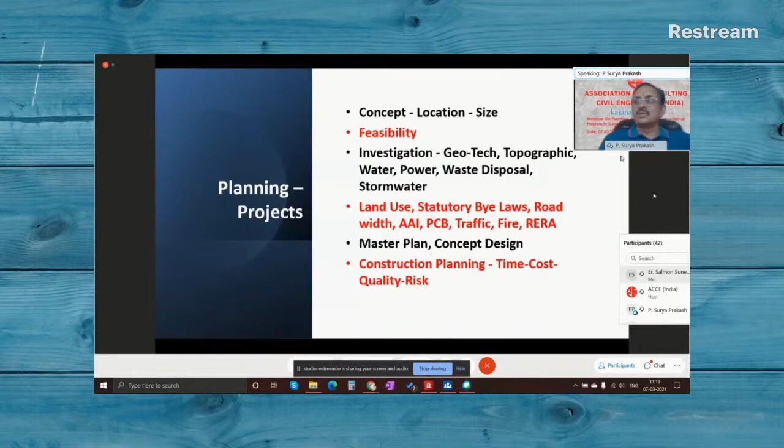And then, while developing the concept and master plan, we should also keep in mind the construction planning - the time, the cost, the quality assurance or quality plan, and risk assessment. This is a major thing actually. Now the risk assessment of the project's implementation is a major subject nowadays in construction projects, so we should also be aware of the risk associated with the project implementation.

Next is projects in coastal districts. What are all the aspects, especially we have to consider while planning the projects in coastal districts? The first and foremost important point is the exposure condition, particularly when we design reinforced concrete structures.

As per IS 456, we have the exposure conditions defined - severe, normal, moderate, and extreme exposure conditions. So we have to assess the exposure, the salinity in the atmosphere and temperature variation. And probably if we are designing the structure closer to the sea coast, the humidity and the seawater splashing also. So we have to keep in mind this exposure condition.

And then comes the marine clays. This is the biggest challenge in coastal districts whenever we plan. Normally you encounter marine clays in the coastal areas. What is marine clay? Actually, marine clay is the soil strata which has negative SPT values. That means even when you try to fill the ground - if you fill 2 meters of earth, maybe after a week it will become zero again. So it settles very fast, and marine clays we have to handle very carefully.

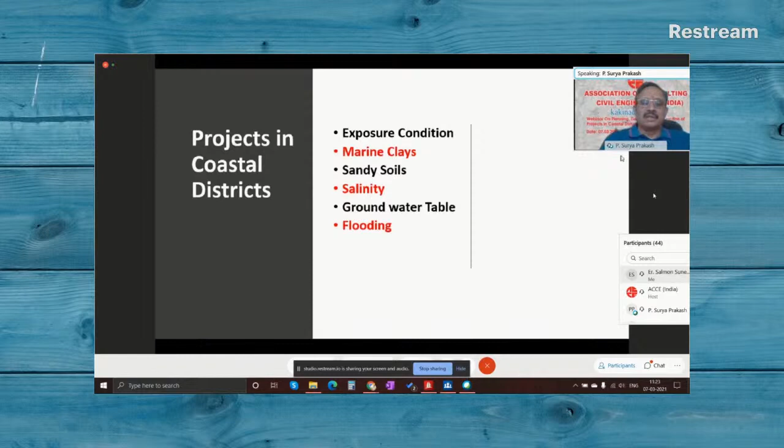Tsunami is a phenomenon which we have been coming across in the last 2 to 2.5 decades, since 96 if I am correct. So tsunami is another risk factor we have to consider while designing projects in coastal districts, particularly the East Coast, which is prone to this tsunami phenomenon.

And the cyclones. Every year the East Coast experiences at least 2-3 cyclones, and now it is increasing also. Storm surge, like we had in Machilipatnam district, that was in the mid-1970s if I am correct. So there was a big storm surge actually.

So whenever we design projects in a coastal district, the storm surge also we have to study, and ground improvement is a compulsory thing we have to consider for economical and effective foundation design.

Dewatering systems. We must all be aware that when we handle projects on the sea coast where we have a shallow level groundwater, we have to do the dewatering. Normally the practice available in coastal districts is a suction ring main, suction buffer we call it. So we put bore wells up to 2-3 meters depth, and around the building we prepare a ring main, and then we suck the water.

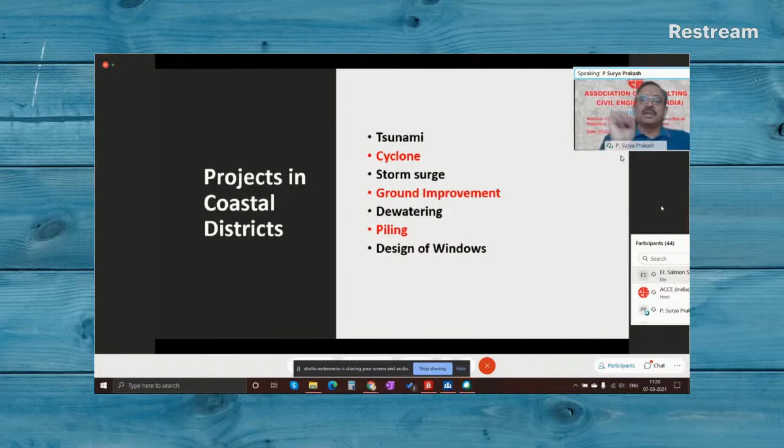So we have to test the windows, or check the windows for wind effects in the design, whether it is hinges or the glass panes or the closing. Because we design the building for a closed condition, the openings, the percentage of openings, has bearing on the wind pressure coefficient we consider. But if we don't design these windows properly and they fail, the openings will increase in the building. I have come across many buildings failing because of these windows not being designed properly.

Next is sheet piles, another method. In Mumbai it is very widely used. You can use sheet piles to cut off water ingress into the construction area. Sheet piles or touch piles is another method. In Vijayawada and even in many other project sites, we have used these touch piles.

Next is jetting, jetted piles. That is, we use a water jet to drive the piles when you have to do piling within the sea coast. Jetting is the method which I used about 27 years back in one of the projects in Tupilipalem, Gudur district.

And corrosion is another major issue if we don't take care of exposure conditions and treatment of steel structures, particularly painting. Most of us make a mistake about the application of primer and protective coating. As per code, when we apply primer to any steel structure, or even a concrete or cement surface, we have to apply the first coat of protective coat within 24 hours.

Because the objective of applying primer is to neutralize any surface exposed to atmosphere. If you don't apply protective coating within 24 hours, the neutralized surface will not remain neutral; it will again become basic or acidic. So it's a very important aspect to specify painting of the first coat within 24 hours of applying the primer.

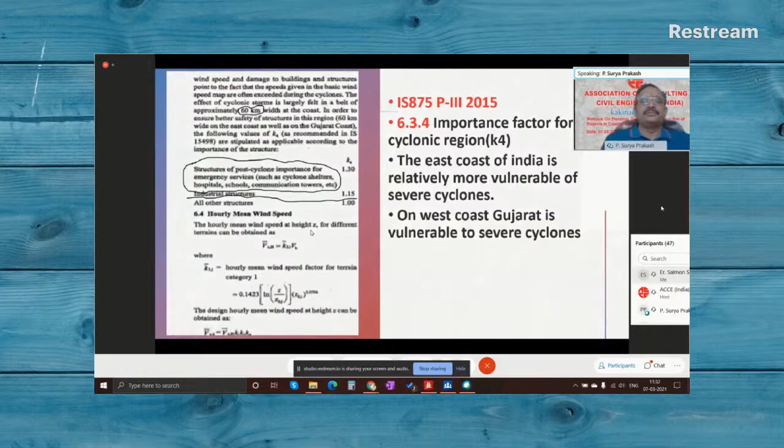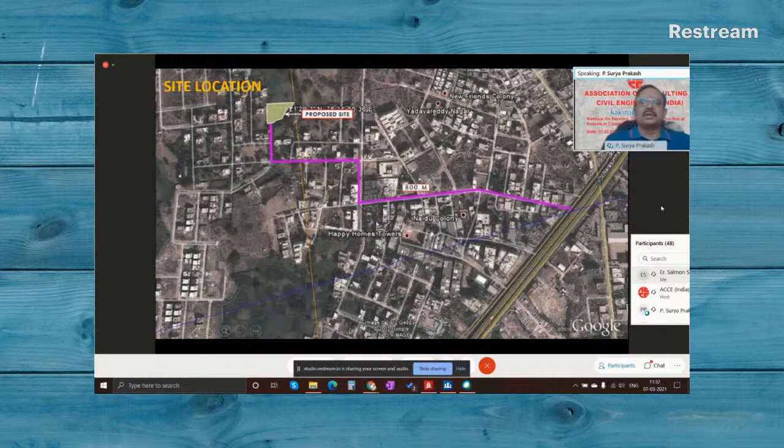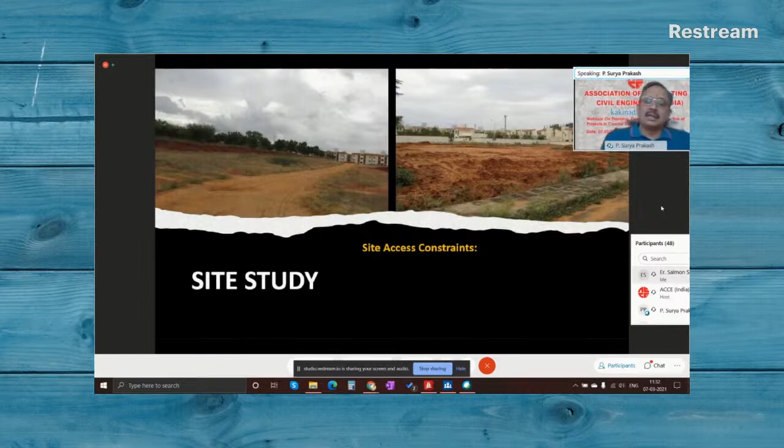Next section that we are talking about is the planning. Whenever we plan the projects, we have to identify the site location and approach to the site from the nearest highway to check the lead and the time taken for transportation. Next is the site access constraints. Sometimes we don't have culverts that are designed for the trailer loads that carry the materials to the site. So it's very important to understand the access to the site before planning and before drafting the design basis.

Next is the investigation. We have to plan the stages of investigation. The preliminary stage is to check investigation of soil, geotechnical, borrow pits, and backhoe pits also. We do this to understand the site in the preliminary investigation, and sites for disposal of surplus earth, and topographic survey.

Sorry, somebody by mistake, I think, is sharing the content. Please remove the permission to others to share content so that we will not be disturbed. I'll start. Sir, please continue, sir. Do you have my PPT or should I share now? Sir, please share, sir. Oh, I have to share. Okay. Thank you. So I request you to cancel permission to others for sharing, otherwise we'll be disturbed. Yes, sir. Already done, sir.

Thank you. And geological studies. This is a very important aspect. For all important projects like power plants, we have to study the geological history of the site, so we have geological experts who will study it. We all know the Koyna Dam story, where it was built on the Koyna fault, a geological fault, and it resulted in the earthquake. Similarly, environmental investigation, wind roses, climatic conditions by meteorological data.

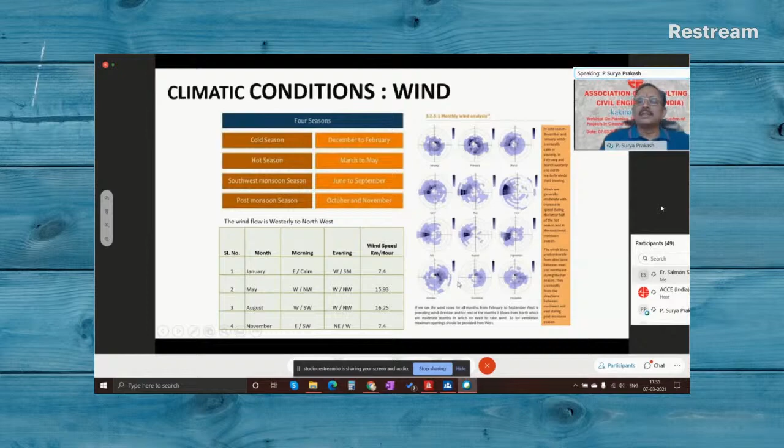So this is typical climatic condition data, month-wise: cold season, hot season, southwest monsoon season, and post-monsoon season. So we have to have wind roses like this to understand the direction of the wind. It will help us in planning the structures very effectively.

Next is the sampling of the soils. We must insist on proper investigation. Particularly, I have seen some of the soil reports: at half a meter they encounter refusal strata and leave the investigation there. Even if it is a hard strata, for important structures we have to collect core samples and have the RQD value, rock quality designation.

So it will give us the idea of, one, the costing of rock cutting and the method of rock cutting, and also the soil bearing. And the calculation of the bearing capacity in hard soils is also a very important factor. I have come across people using very high factors of safety in estimating the bearing capacity for the rock sample.

The method of estimating bearing capacity in rock is to do the crushing strength, and from the crushing strength apply the factor of safety, and then over that you apply a further factor of safety for the safe bearing. Ultimate bearing, one factor, and then safe bearing, another factor.

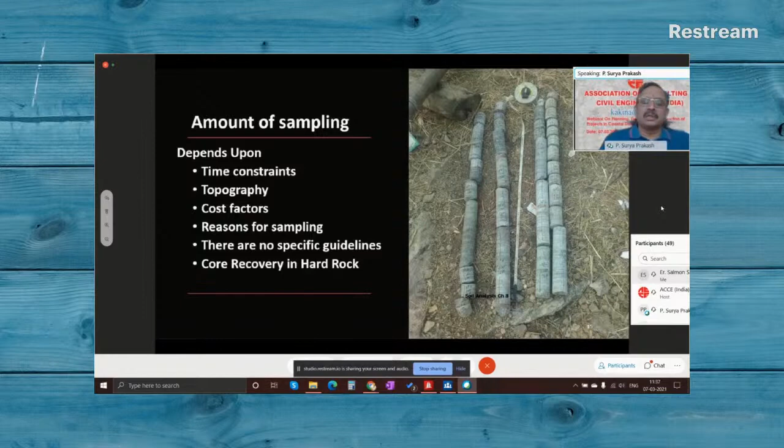So time constraints, topography, cost factors, reason for sampling: we have to decide the sampling very carefully. There are no specific guidelines given in the IS code, but as engineers we have to plan the investigation depending on the requirements of the project and core recovery of the hard rock.

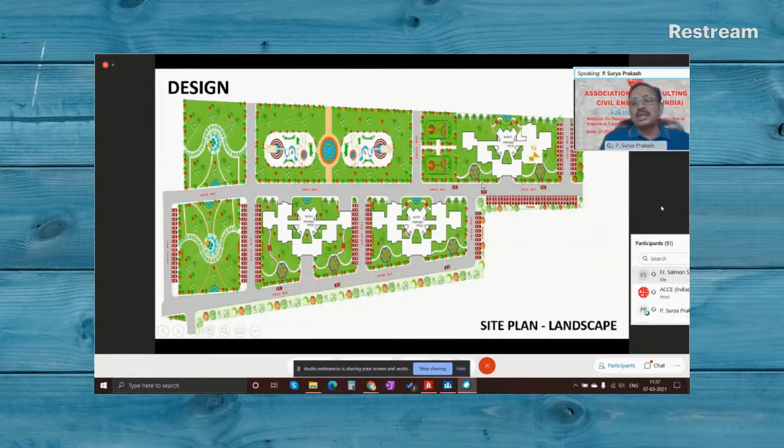So this is a typical master layout. You can see these are the proposed areas in Kudankulam. Actually, we had the opportunity to participate in the design competition, and this is the master plan we did. So the master layout is very important, and then a detailed layout, concept design of each area with the traffic and parking, greenery, and other amenities and utilities we have to consider while planning the layout.

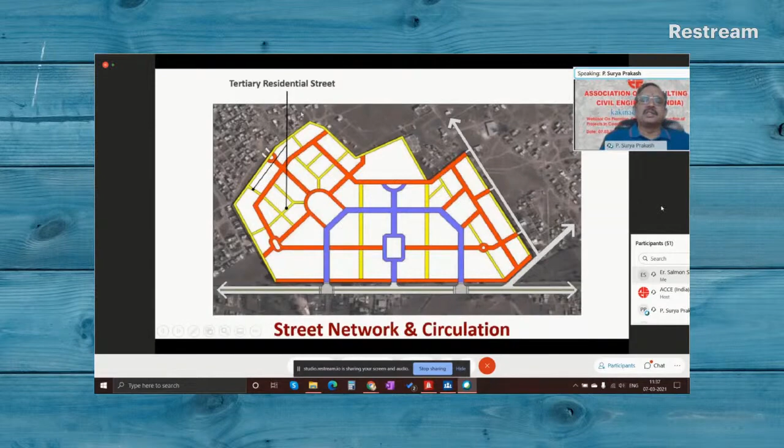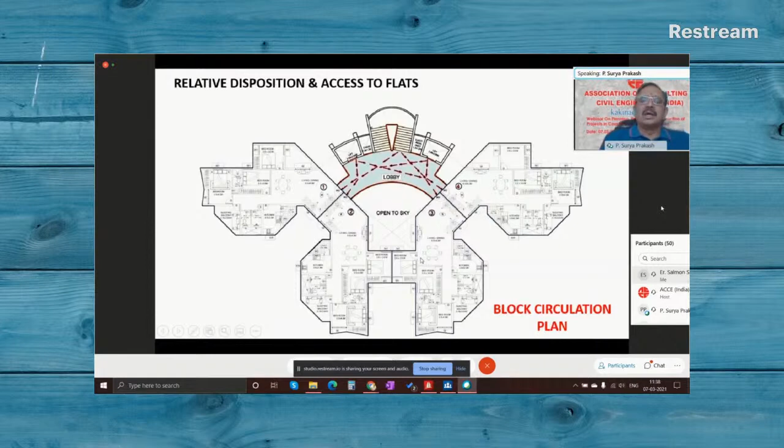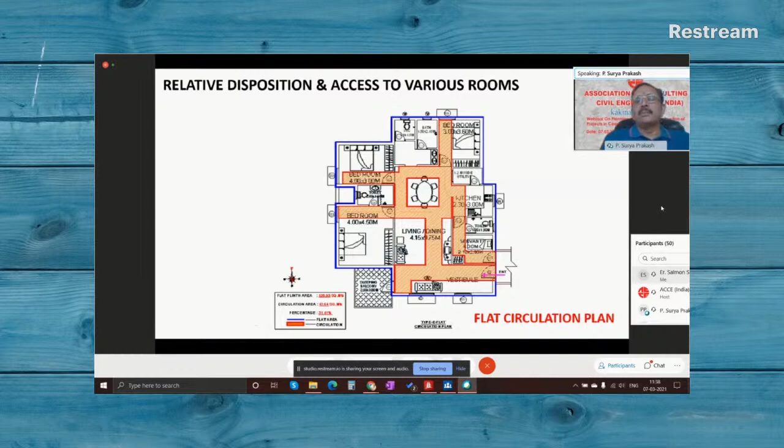And similarly, within the unit, what is the circulation area? So effective area versus circulation area. So these are all the calculations. We have a percentage of circulation of 31%. Here you can see flat circulation. Apart from that, carpet area versus plinth area versus common area, super built-up area, and carpet area versus circulation area. So these are all very important in planning, and we must consider these aspects while doing the plan.

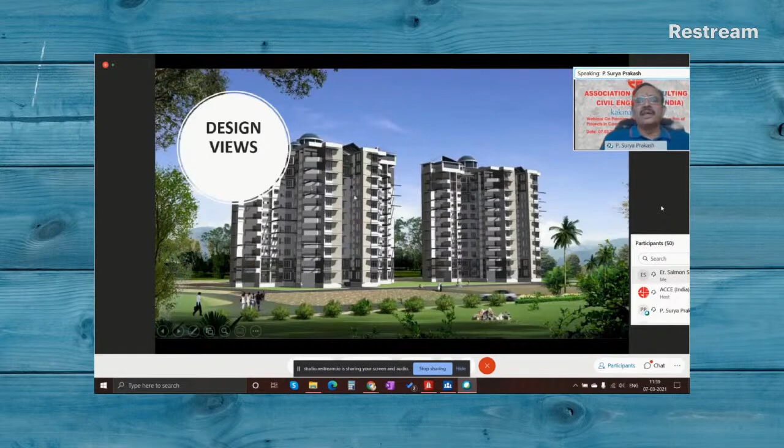So design views: this is the planning done in Seacoast, that's why I'm showing it. We thought that every dwelling unit should have a view of the sea. That's how we planned. And coming to the design, architectural, civil and structural, and MEP: the functional requirement document, FRD, considers the design intent of the client; the requirements are defined in this document. And based on that, we prepare the design brief, whether it is finishes, facade, or functional requirements like toilets or area allocation, all that is defined here in the planning.

Based on that, we do the design development and coordination, bylaw standards and codes, space, material specification, finish, utility areas, facade, and external services like amenities, landscaping, parking, entry gates, driveways. So these are all the things we have to consider in the planning. And detailing, quantity survey, costing, and the product specifications. Vendors also we have to consider in the design stage itself. And the financial, technical, and tender approval for procurement before going to the construction stage.

So next is construction engineering and procurement, like contract packaging, site enabling, and method statements for execution. I always say that we should never leave the method of execution to the engineers on site. The contractor's planning engineer should prepare the method statement for each activity, whether it is excavation, marking on site, PCC, or waterproofing; for all activities we must prepare the method statement and get approval from the consultant. This we have implemented in projects, where there is no misunderstanding of the drawing and the method of execution.

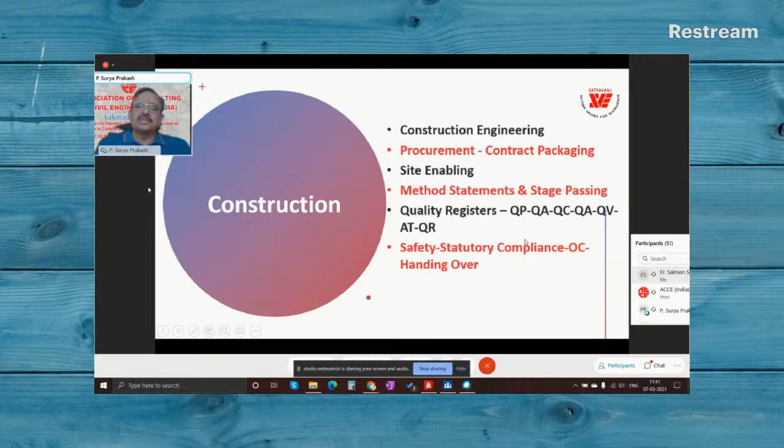Safety, statutory compliance, occupancy certificate, and handing over. So these are all the steps that are very important. So now getting into the core topic of today, that is projects in coastal districts done by our company, case studies where I'll explain the contribution that we have done for various coastal projects, so that it will help you to consider these aspects while planning projects in coastal districts.

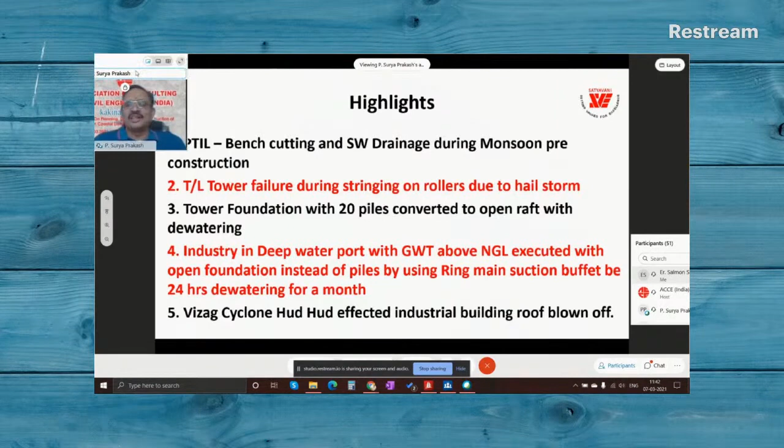So I'll share the highlights. We are used to reading headlines in the newspaper, so same way I have put the highlights of each project. So PTIL is a project we did in Pedapuram, which is about 50 acres of land sloping towards the highway, and the client wanted leveled ground, and we foresaw that flooding would be an issue because the project commenced in July, and July is the month with maximum rainfall in East Godavari particularly, so we planned the stormwater drain.

The client was joking with me in a lighter vein that you are doing an irrigation project instead of an industrial project. I said, sir, this is very important because we had a very stiff timeline of 9 months. We did the foundation stone in July, and that July had the highest rainfall of 100 years. Fortunately, because we constructed the stormwater drainage before commencing excavation itself, my client sent me a photograph of that drain full of water and said, good you have foreseen this situation. Otherwise, our project would have come to a halt.

Imagine 50 acres filling with water, and if you have to do dewatering, you could never complete the project. Thankfully, we completed that project 6 days ahead of schedule in 9 months, in spite of the heavy rainfall. The stormwater drainage really helped. It's one of the important things I did in the mid or late 90s in Kakinada.

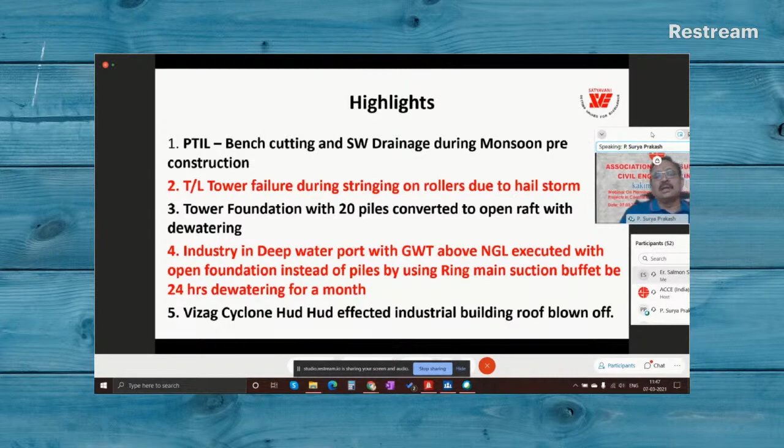But when I reviewed the soil report of that site, I found that up to 6 meters depth there is a good strata, and beyond 6 meters it is marine clays. Normally we go for pile foundations when you have the hard strata at a deeper depth. But here, the marine clay is there from 6 meters up to 30 meters depth. So it is never economical to go for pile foundation in such a case, because for industrial sheds the loading is less compared to a normal building.

So I suggested to the client that we go for open foundation with the dewatering system. And I have shown the calculation value engineering report where I was saving 20 lakh rupees, apart from saving the time, because we could complete the entire foundation system within a month's time by maintaining 24 hours dewatering for that site. Unfortunately, I couldn't locate that photograph because it is more than 20 years old. But we could maintain the dry condition for a whole month and completed the foundation. And the client was happy because we saved the cost and time.

Next is the Vizag cyclone Hudhud affected industrial building. The roof is blown off. A very surprising incident in Vizag, a structure designed by us. When we investigated, we found the problem was the anchor fasteners, the self-tapping screws we use for the roof sheet. Even the Vizag airport roof was blown off during Hudhud. So it's very important to specify the anchor fasteners and test these anchor fasteners.

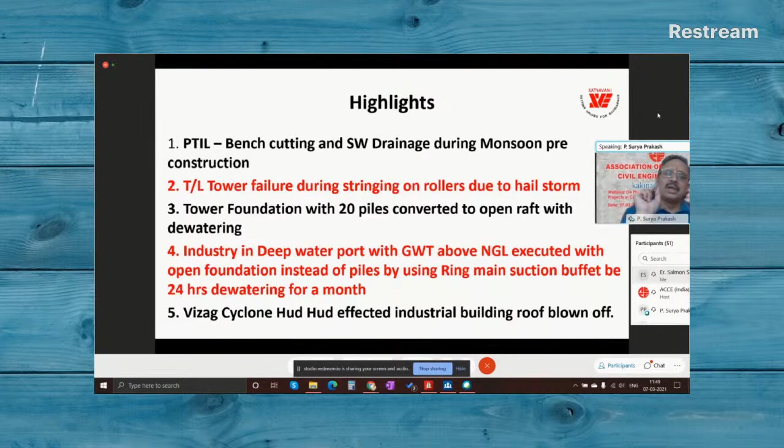The washer that we use and the tightness we have to specify and check very carefully, particularly Hilti fasteners with neoprene washers. We have to use the neoprene washers, not the rubber washer. Because the cost difference between neoprene and rubber washer is too much, contractors tend to go for rubber washers. So we have to check these washers also, because the rubber washer will get decayed with water exposure, whereas neoprene is a material that will stay for long. So it's always better to use the neoprene washers. That is very important.

Next is the power distribution poles. We were consultants for the Government of Andhra Pradesh for hazard mitigation and the emergency cyclone recovery project. I'll share some of the photographs where the distribution poles, normally put along the roads and canals, particularly in East Godavari, will be inclined. Normally these pole foundations are not designed properly. We have to design them as a stem foundation. That means we have to use the shear modulus of the soil for design of this pole foundation.

Next is the plinth level for the towers in paddy fields. This is another thing we observed. Most of the towers had corrosion in the bottom stub portion right above the plinth level, because for the plinth level they used to follow 230 mm, 9 inches above the ground level. In paddy fields, the water itself will be about 1 foot. And in the rainy season the water level will rise, and because of the exposure condition there will be extensive corrosion in the leg. So we have specified an increase in the plinth height.

Next project we did is in Cochin, Hyquip. There is a marine clay, and when we started the ground leveling, it used to sink. So we have used prefabricated vertical drains so that you take out the water as you fill the soil. This is a ground improvement technique which we adopted, which I'll also share.

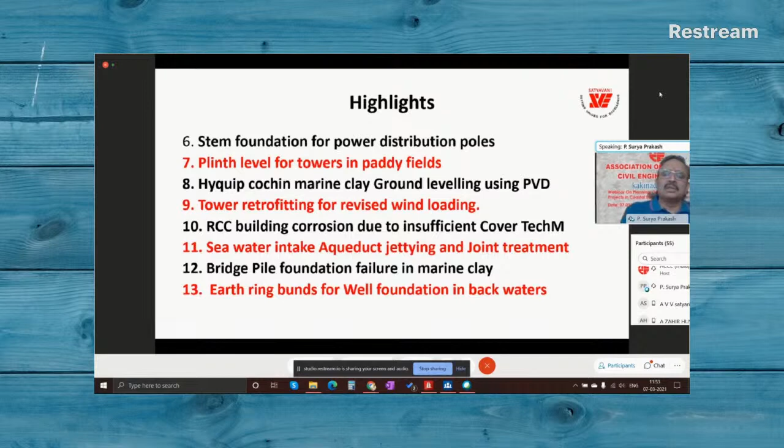And earth ring bunds for well foundation in backwaters, and then roof sheeting anchorage, as I said, clamps, screws. Nowadays we are having the standing seam, seamless roofs. There we use the clamps, so we must check and inspect these clamps very carefully, or if we are using screws and washers, we must check these screws and washers.

Expansive swelling soils: proper design of piles, or treat the foundation soil. That's very important. No saline water to be used in construction. So check the water quality in coastal districts. And you have to give provision, if required, to treat the saline water or to remove the salinity in the soil. And mostly we use sulfate-resistant cements in the coastal regions. In the very first project in '94 itself, we used sulfate-resistant cement.

Seashore sand not to be used, that is very important. And many people tend to use pit sand, which is also not good. We have to have sand conforming to the gradation specified in IS 383. And scouring, this is another important phenomenon. On the sea coast, you will have scouring of the soils, soil erosion due to the wind. So we have to consider these aspects.

And uplift anchorage at every stage of load transfer and side thrust. This is very, very important because in buildings, industrial buildings particularly, there will be uplift in the structure. So we have to check the anchorage, do uprooting tests, and check the foundation and the structure also, because cyclonic winds will lift the structures. So we have to check uplift anchorage at every stage.

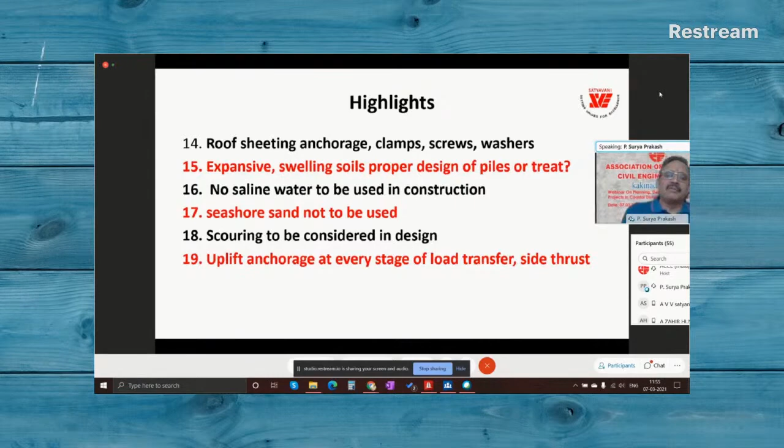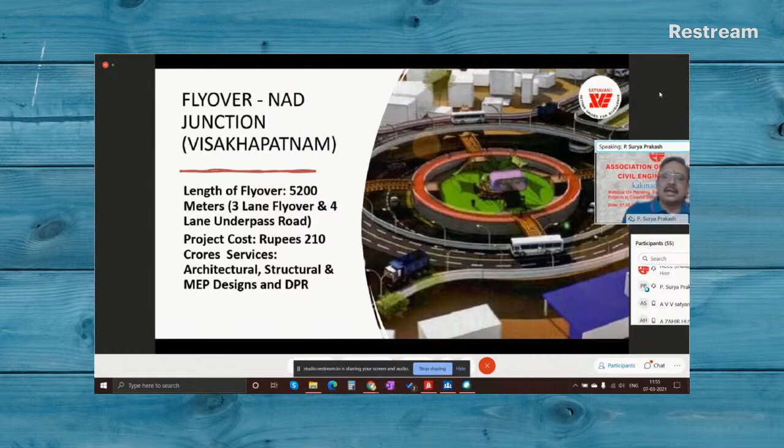So now I'll be sharing the photographs of the projects. This is a flyover rotary management system we are doing in Vizag, which is nearing completion. We have completed the design and execution is in progress. This is the NAD junction rotary management system with precast I-girders. So this is the design we did.

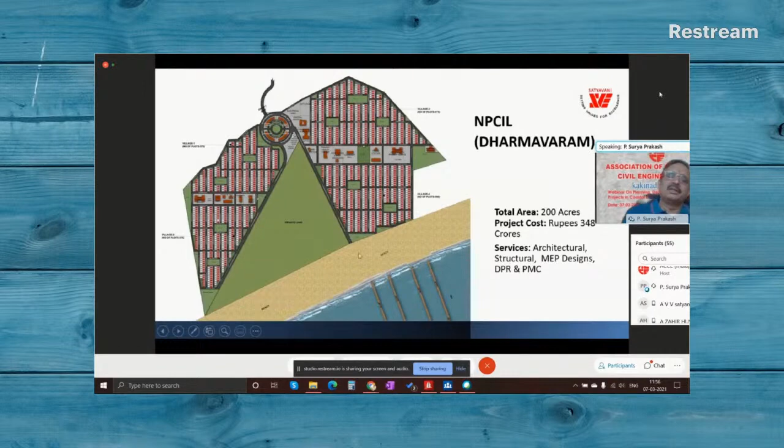And this is in Srikakulam. We are doing a township for which the DPR has been approved, a 350 crore township project with 2,000 houses. This is on the sea coast, and there we have planned a fishing harbor kind of thing for the fishermen who are going to live here. These are some of the views of this project. So while planning, we considered all these.

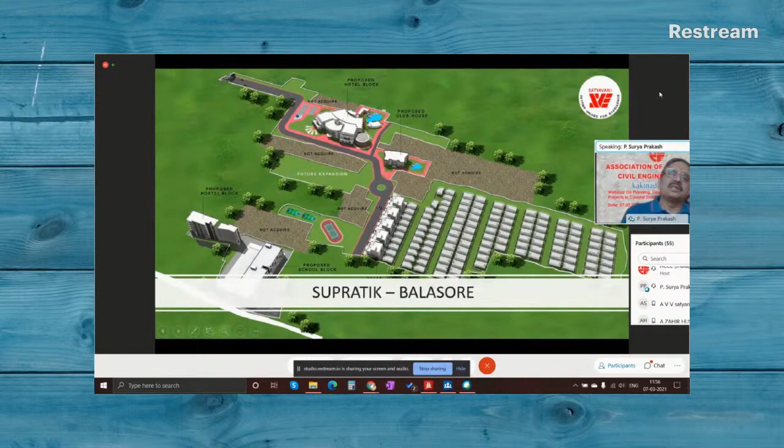Next is Balasore. We have done about a 60-acre project. It's a master plan with villas, a school, and a star hotel with a convention center, which was planned by us and executed by the client. And in Vizag, we have done Tech Mahindra, where we had a problem during Hudhud with the windows because of improper execution. So we had to retrofit those windows after the Hudhud cyclone.

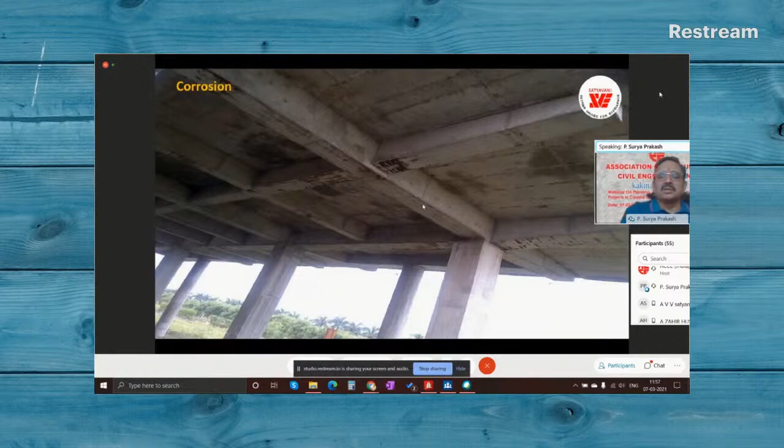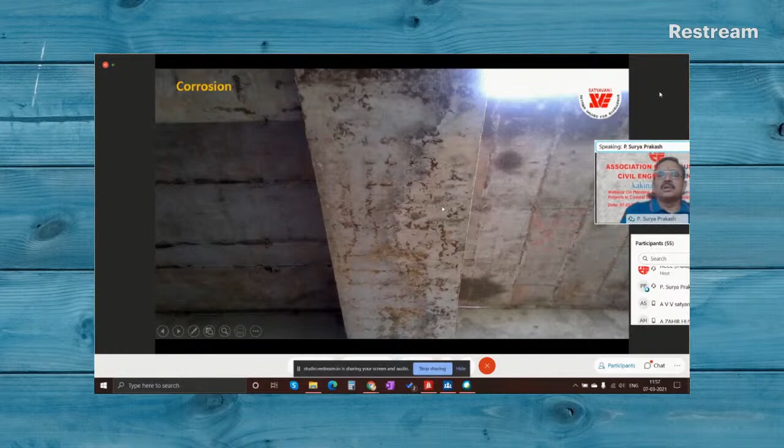You can see the corroded stirrups and the main bars in the beam due to corrosion. And this is the column. You can see the column ties and the main bars. You can see you don't have to do the profometer.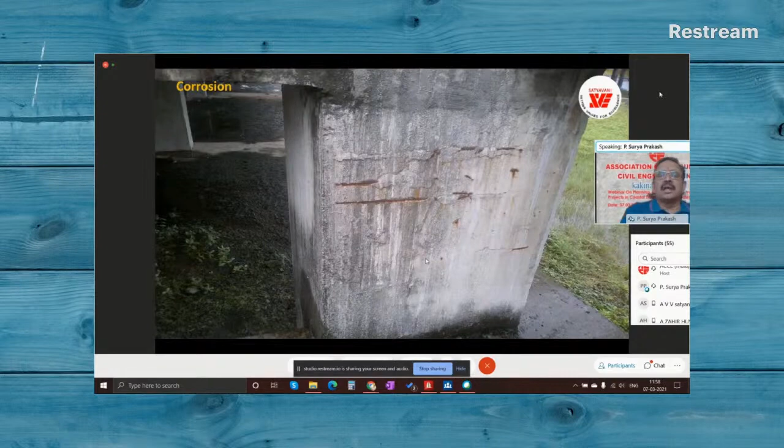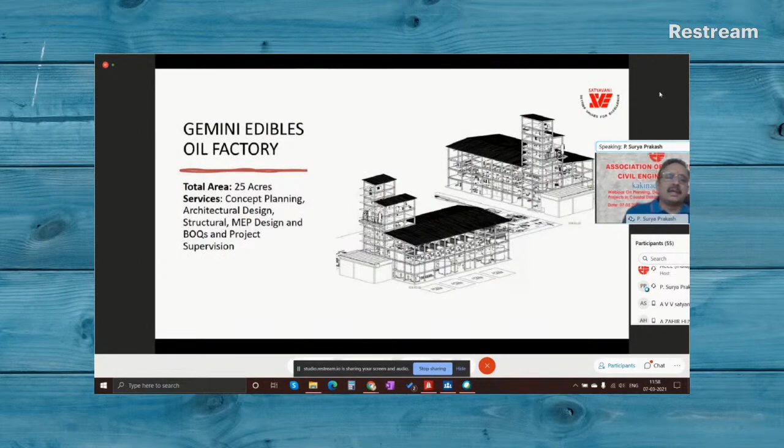This is another edible oil factory we did in Kakinada. This is also a completed project - a steel and composite structure, recently completed last year. These are pictures of the completion.

This is a naval dockyard office structure we did in Vizag, which is Griha rating targeted. And this is a palm oil mill project in Pedapuram near Kakinada.

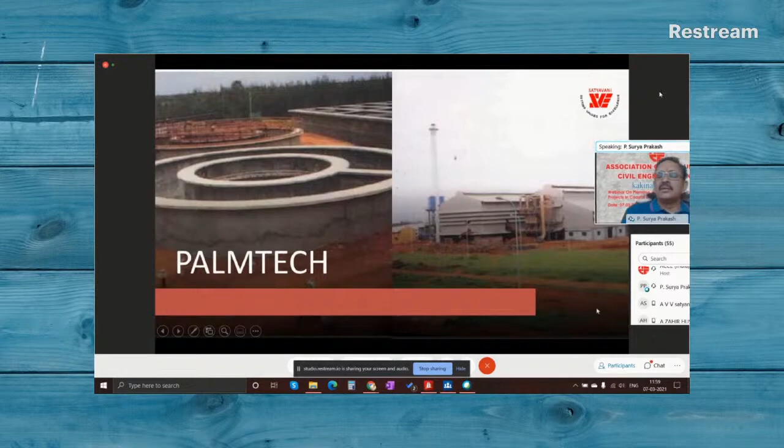This is where I mentioned we had stormwater drains. This is the layout of the project - we have 50 acres, so we did these stormwater drains before even commencement of the work. The whole area was excavated to make a level ground, so for that this stormwater drain was built. During construction, a 3-meter width and 3-meter depth drain was executed, and it worked perfectly.

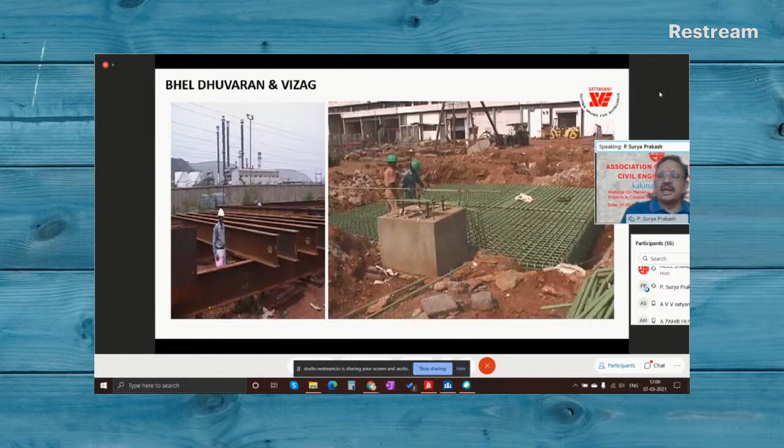In Vizag, we did the gas turbine project for HPCL through BHEL. You can see we used protective coating on the rebar in the foundations and structure, which helps reduce corrosion as we discussed. But in implementation, we have to ensure the painting is done adequately. This is the HPCL power plant.

Next we did the balance of plant works for Gautami Power, now called Reliance Power. And this is RNA Agrotech, which we did in Deepwater Port in Kakinada.

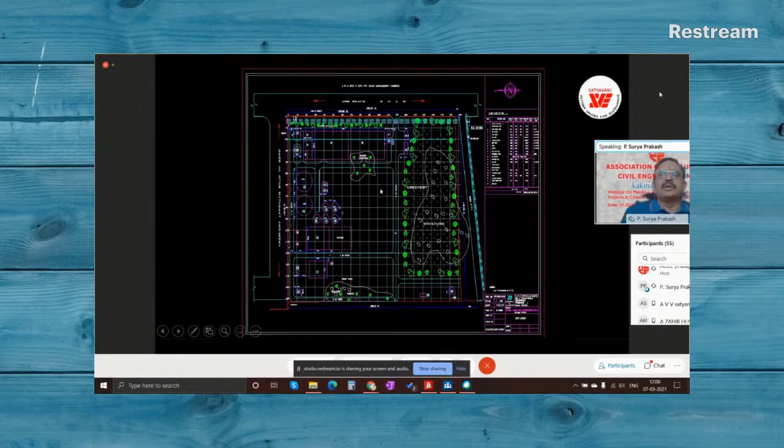This is the layout of the project, which is on the sea coast, and the ground level was half a meter below mean sea level. For this entire plant area, we did the dewatering system and maintained dry conditions at 2-meter depth, in spite of the water table being above ground, and we could successfully complete it.

These are photographs during construction of the Arni Agro project. You can see the ground - it's all moist ground. In spite of that, we could maintain dry conditions and completed the project on time.

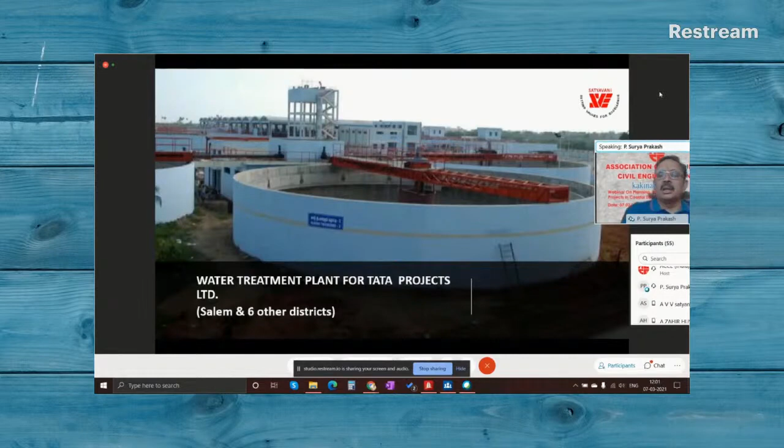These are water treatment plants and sewage treatment plants in Salem and 6 other districts in Tamil Nadu, a project worth more than 100 crore. We did it for Tata Projects EPC, as EPC consultant.

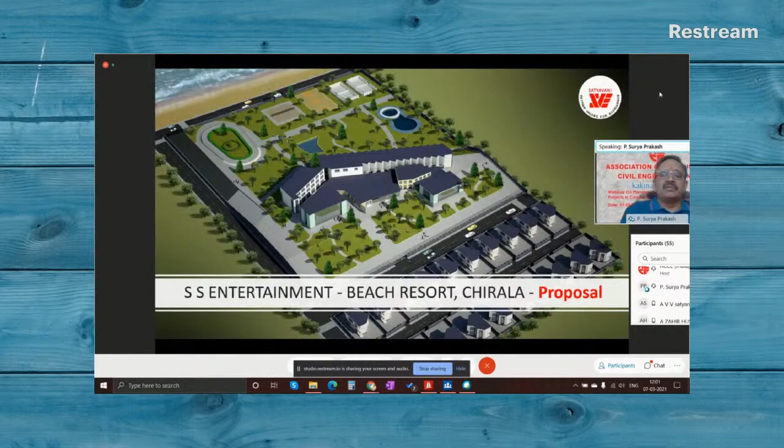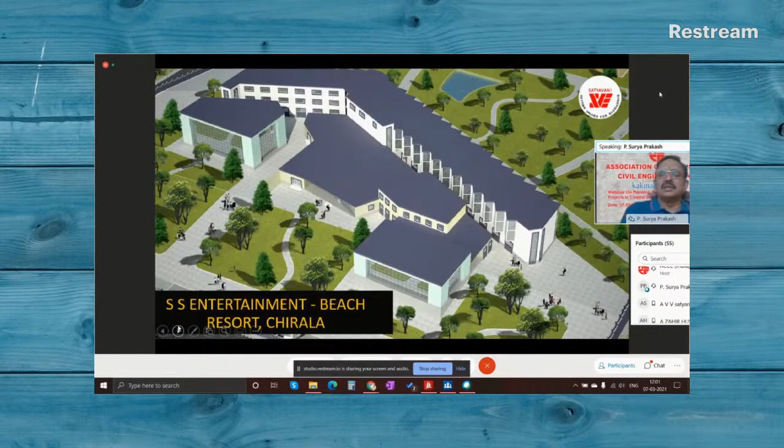And this is another resort proposal we did near Chirala. This is the concept we gave to ensure every room gets a view of the sea - that's how it's planned. There are other options we've done for this beach resort.

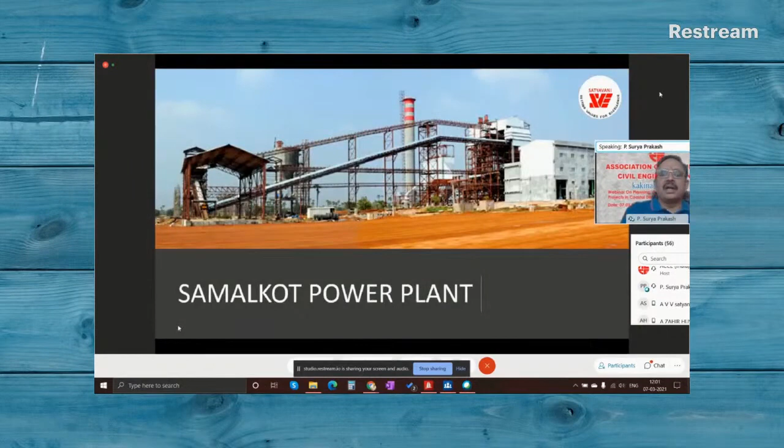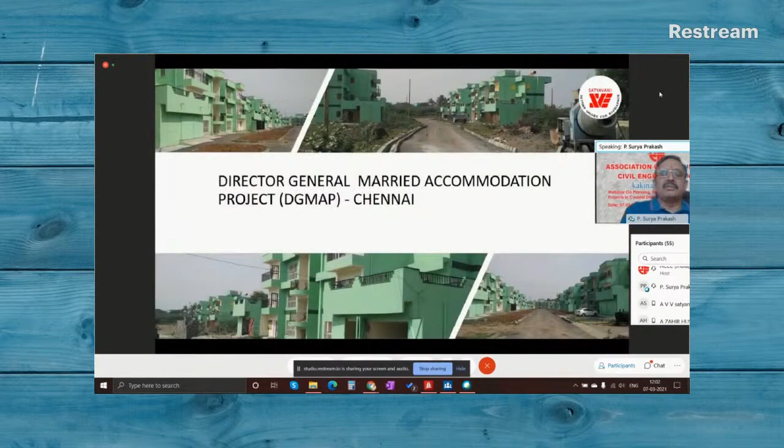This is the Samalkot power plant, balance of plant works we did. And housing we did in Chennai for defense - this is a married accommodation project. These are all the completed photographs of this project in Chennai, the married accommodation.

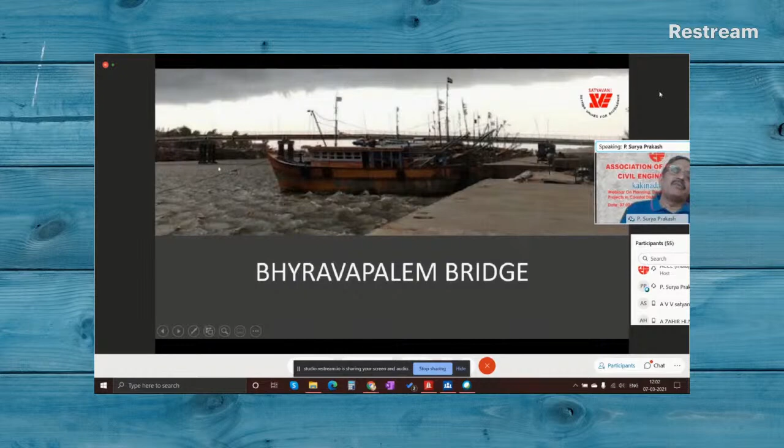And this is a bridge we did in the backwaters in Bhyravapalem, mainly for cyclone evacuation and AP hazard mitigation. Here we used the ring bund and well foundation, caissons. This is the photograph of that.

In Nellore, we again did hazard mitigation bridges for the irrigation department. And this is a mall and multiplex in Ongole, where we used precast driven piles, not bored cast-in-situ piles - so driven piles are used here. Because we had the water table at 2-meter depth here too, we didn't go for open foundation, and used precast spun concrete driven piles instead.

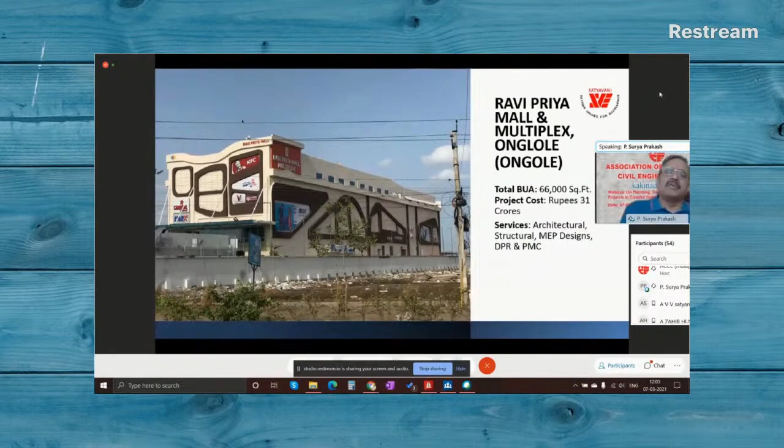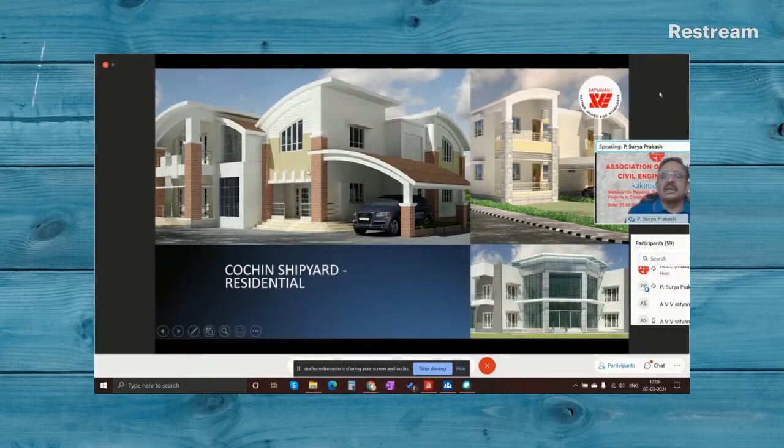This is the transmission tower I was talking about that collapsed during stringing. We used rollers on the conductor for stringing, and when they were left on the conductor without locking, the wind span increased threefold, so the tower collapsed even before it was strung with conductors. We have to be very careful while specifying the safety-during-construction specification for transmission towers.

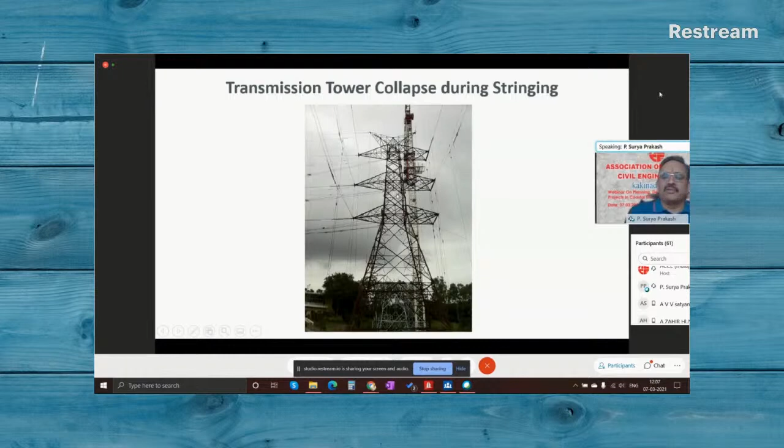This is the 90-meter tower I was talking about in Kakinada, near this, for Idea Cellular. It's a tower designed by us, and the foundation in Kakinada—we had to convert from pile foundation to raft foundation, which was successfully executed.

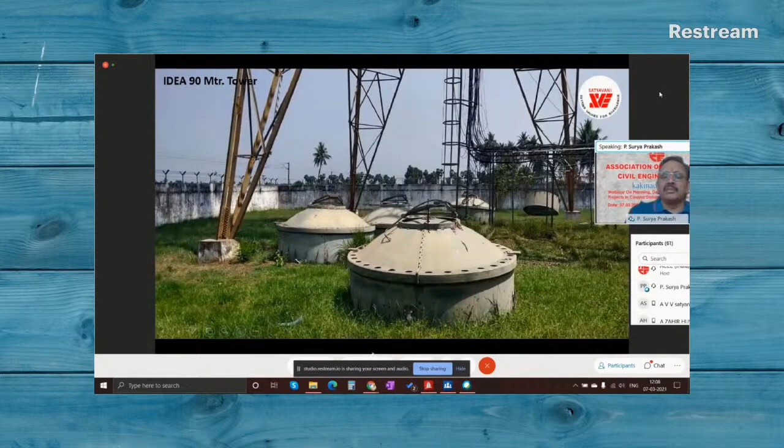This is the foundation in sandy soil which was done, and this is the drawing for a raft, an annular raft. With the concept of annular raft, we did the tower foundation as a raft foundation.

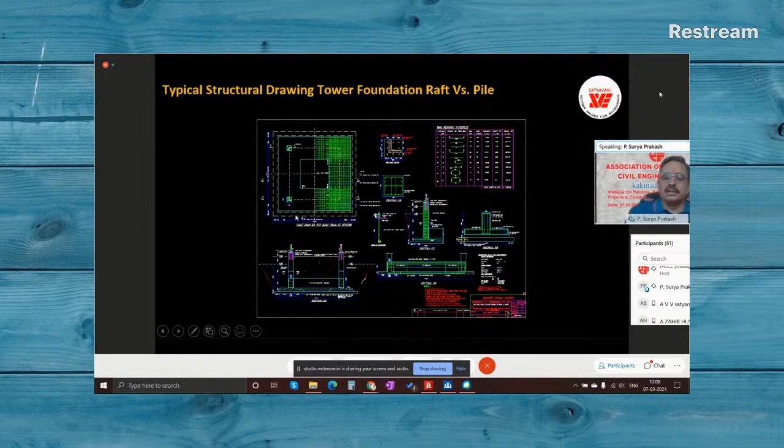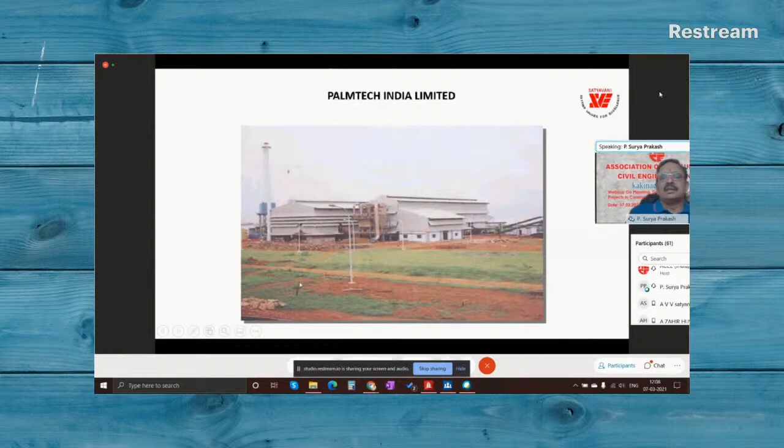This is the palm oil mill I was talking about, which we completed 6 days ahead of schedule. You can see the stormwater drain here, and these are the oil tanks.

Oil tanks are an interesting foundation we always design with hoop tension. The force transfer is by hoop tension because bearing is not critical here since it's oil—ultimately we transfer the load by hoop tension.

So here we just make a ring beam, fill it with sand, and on the sand we put the bitumen carpet and erect this steel structure, because the whole load transfer is by hoop tension—the weight of oil is less compared to water even, so bearing is never a critical thing.

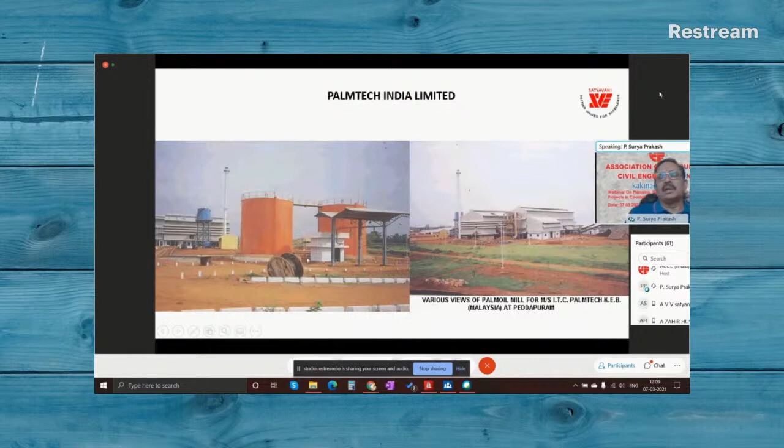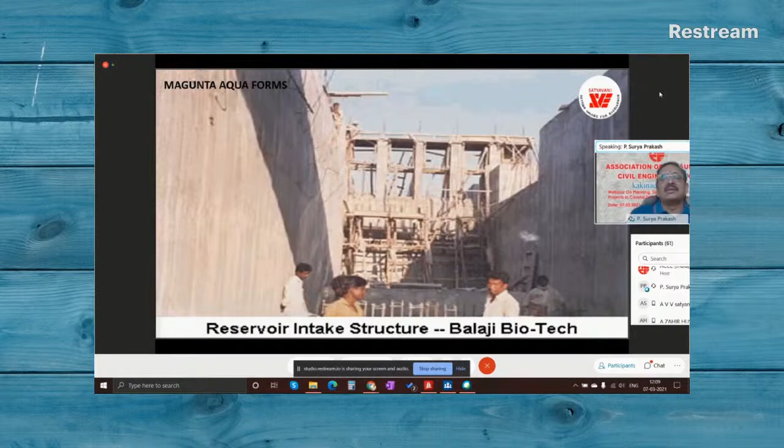Very interesting design. This is the aqueduct I'm talking about in Gudur, near Gudur in Nellore district. This was our first project done by our company—a 1.2 kilometer long aqueduct with seawater intake. You can imagine the cover aspects, protective coatings, water barriers, and expansion joint treatment involved—all challenging, but we successfully did it.

And these are photographs during execution, about 27 years back.

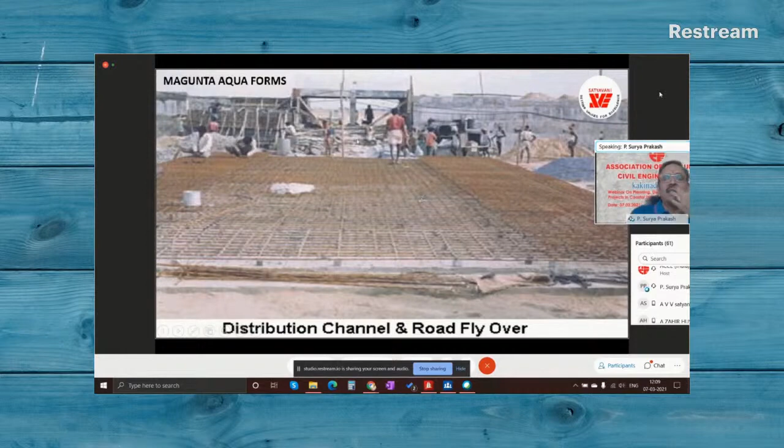So this is a flyover over the aqueduct, and we have designed the aqueduct with adequate cover. The latest we did was last year during the lockdown period.

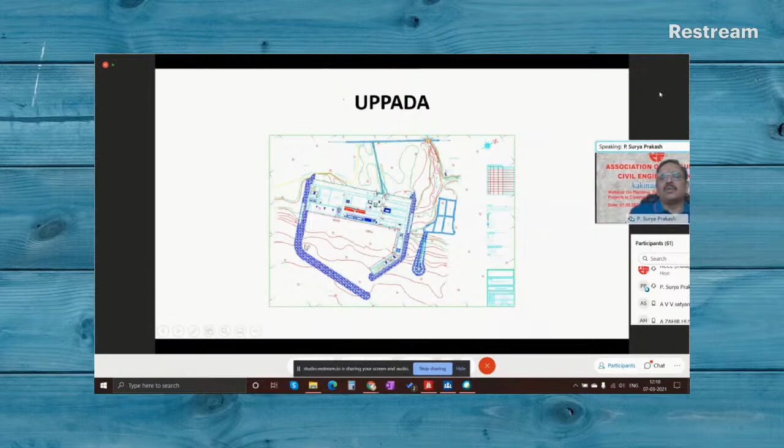We did the review of the DPRs for the fishing harbors in 4 locations in Andhra Pradesh. This is Uppada near Kakinada - the fishing harbor and the breakwaters. We have done the DPR validation and submitted it.

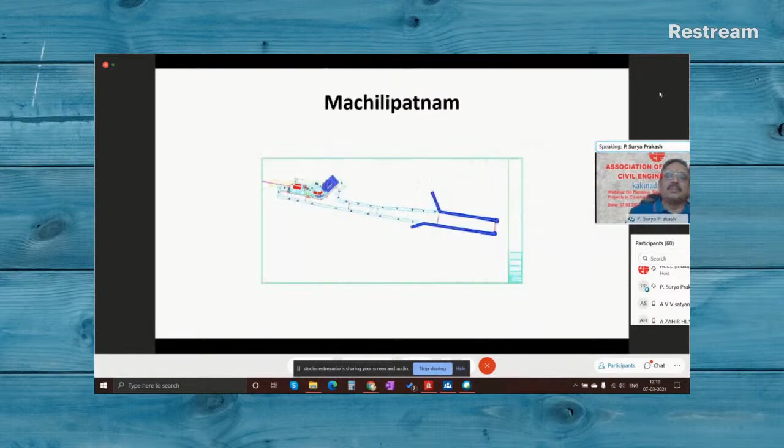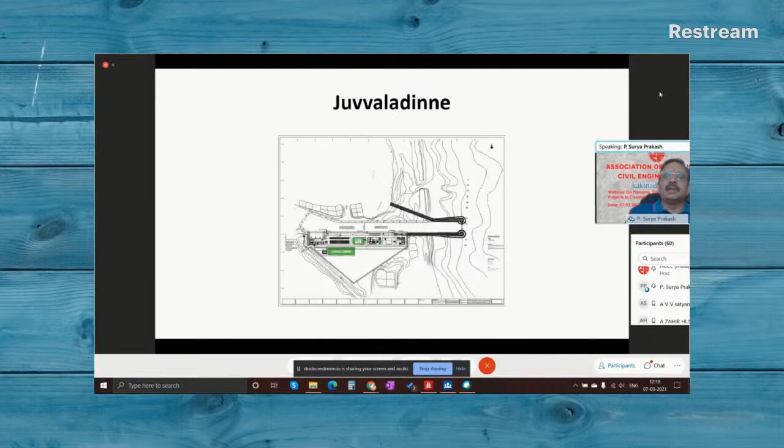Another fishing harbor is in Nizampatnam, another is in Machilipatnam, and the last one is Juvvaladinne. So these are all the 4 fishing harbors for which we did the review of the DPR and submitted.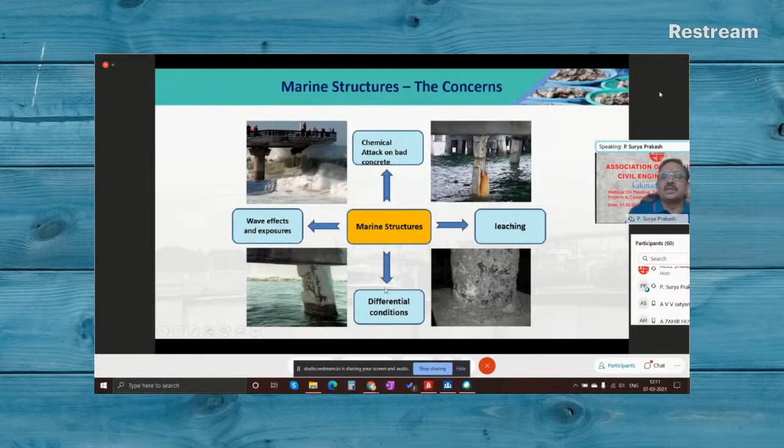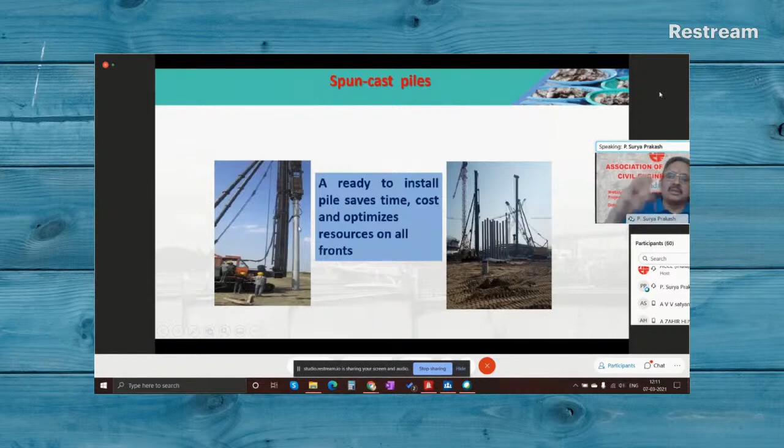So we proposed this precast, spun precast pile in that project for all the backwaters and foundations for the structures. These are factory-made piles, so they will have very good resistance, and the grade of concrete that we can achieve with the normal mix design is M80 grade because of the spinning that we do.

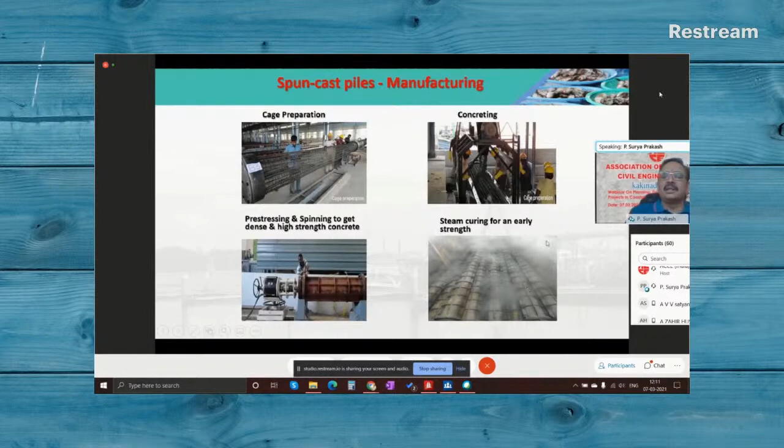So these are all the stages of casting, and load test is done on the pile and transported like this. You can drive the piles within hours. And so you can have ready-to-erect piles with capacity up to 280 tons.

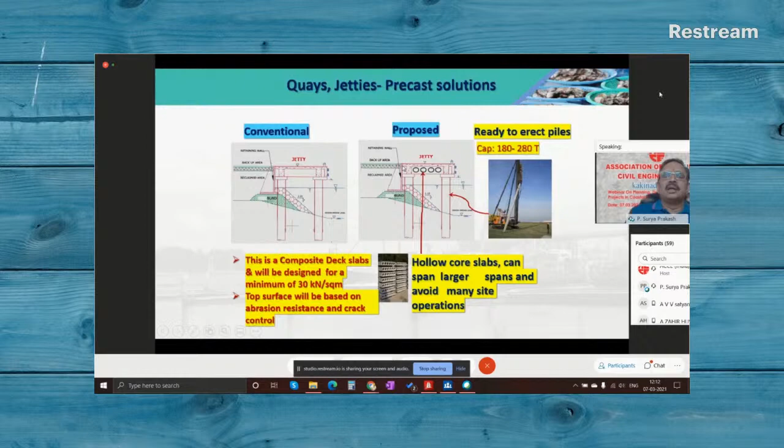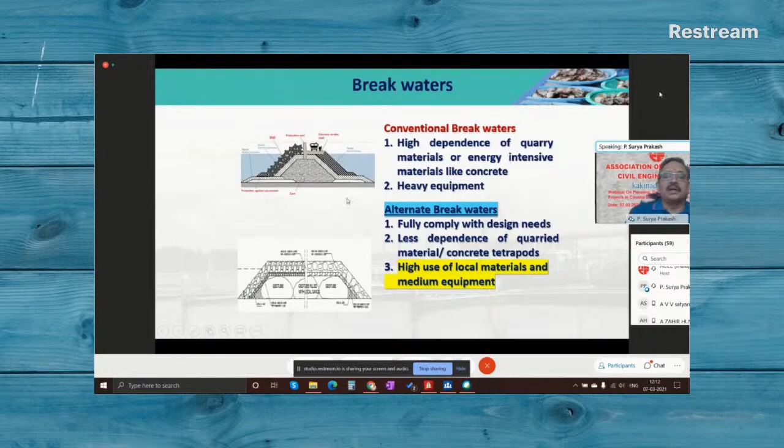We also proposed a hollow core for the jetty instead of conventional concrete, because precast hollow core we can erect fast and do the screed concrete on top. This is for the jetties and quays. And for breakwaters also, alternative breakwaters are proposed with geotubes we have used to reduce the filling and time-consuming aspect of filling for these breakwaters.

So this is the main presentation from my side. Now I am ready to take questions. I request the organizers to pull out any questions from the participants. Thank you.